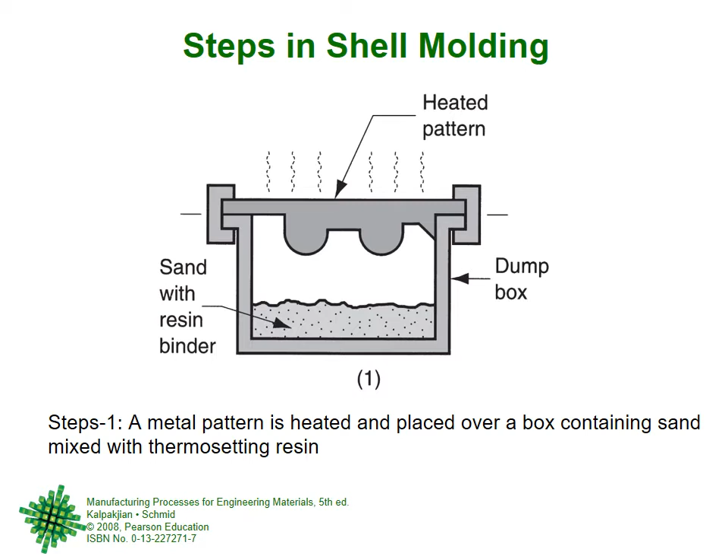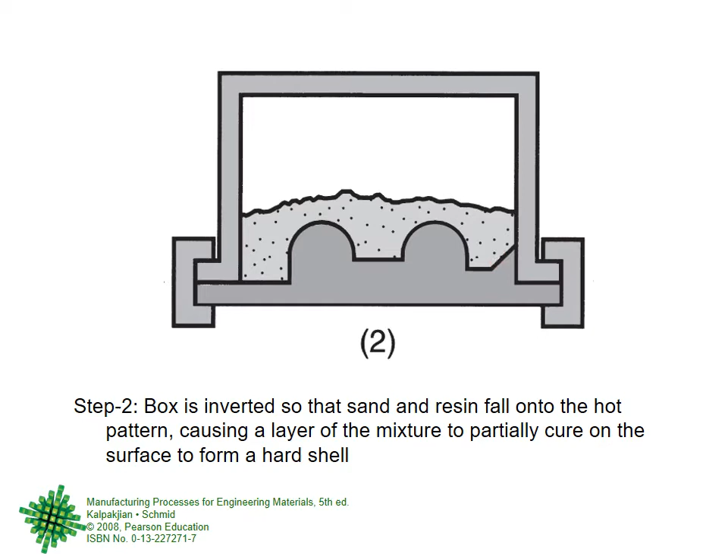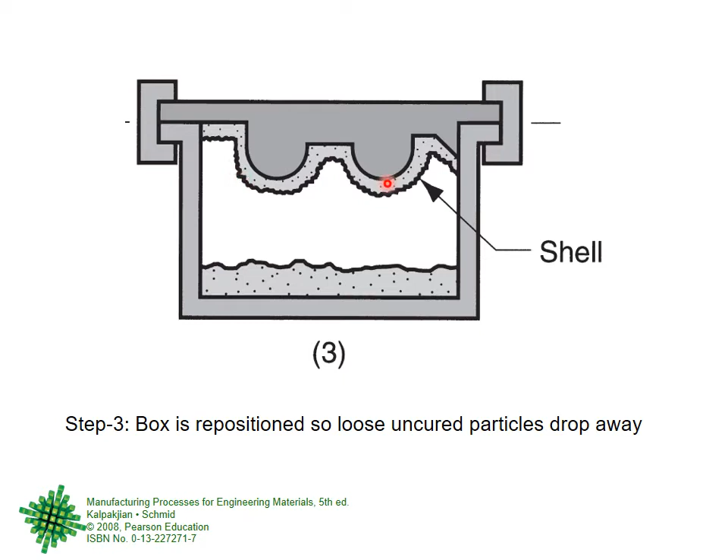So we were just telling you the steps in shell molding once again. So now the box is inverted so that the sand and resin fall onto the hot pattern, causing a layer of the mixture to partially cure on the surface to form a hard shell. So a shell is now made, right? The box is rotated. Now the box is repositioned so the loose particles drop away. So now it is again rotated, and whatever sand glued to it, the shell, is there; the rest of the sand is here.

And then the sand shell is heated in an oven for several minutes to complete the curing. So the shell that was made in the previous step, you take that and you heat it in an oven. Of course, the temperature, the time and so on are pre-designed by people who are very knowledgeable in the type of sand, the type of binder, the type of chemical agent and so on. So what temperature will be in the oven for how much time, 2 minutes, 3 minutes, it is all pre-designed, right?

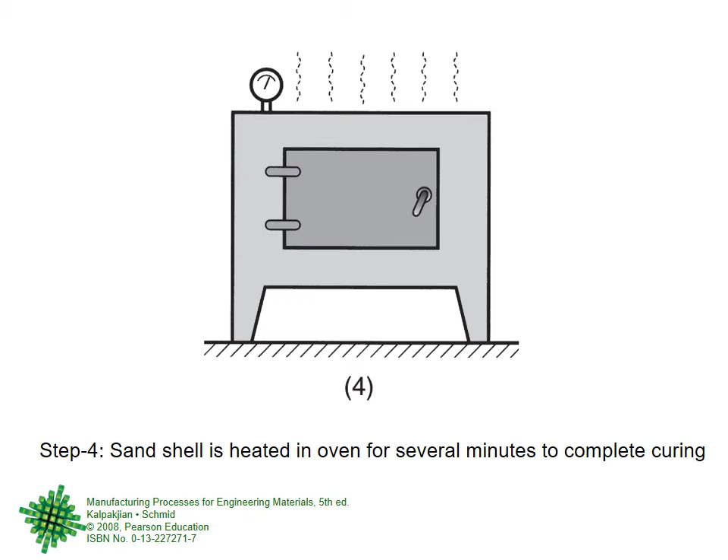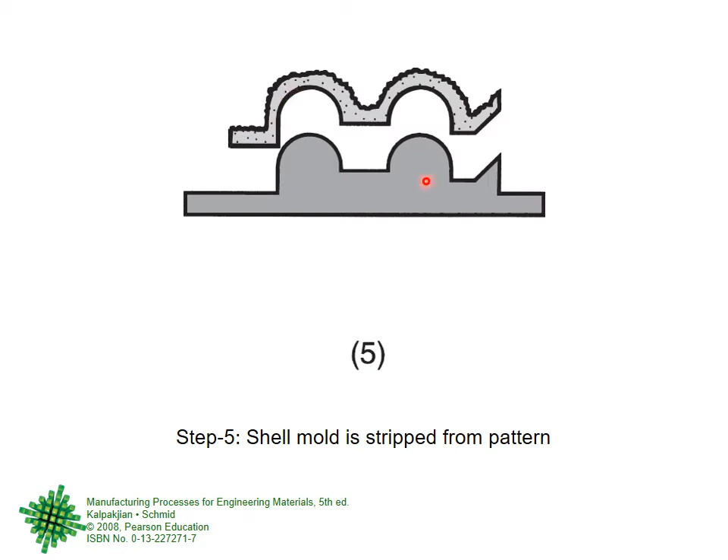So now the shell mold is stripped from the pattern. The pattern is a metal, remember? So now either by heat or because there was already some parting agent here, this shell is removed. So this is the mold. This was the pattern. This can be used again and again to make the shell. And now the two halves. So this is one half, this is the other half.

So now this is the total flask, and the two shells are clamped together, and so forth. So the two halves of the shell mold are assembled, supported by sand or metal shot in a box. Outside it there is some sand or some metal shot. Metal shot means small pieces of metal to support it, because you have to support it now. And the pouring is accomplished. So now you start pouring it, right?

So this will be a little more costly than normal sand casting, because the type of sand that you are using for the mold here is much finer. That is why the surface finish and the dimensions are better. And then you need those metal patterns to be heated, and then you need some oven curing afterwards, and then you need to pack this general sand around it. So it is a little more cost.

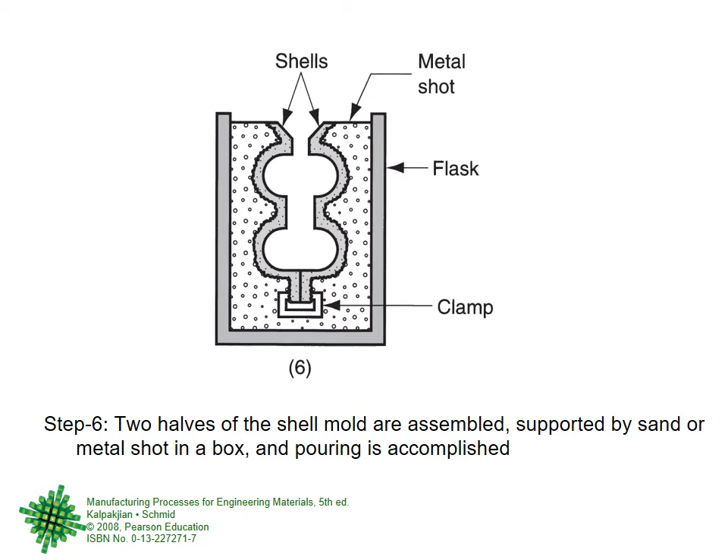Advantages and disadvantages. I think you already know the advantages, but just to save time, we will quickly go through it. A smoother cavity surface permits easier flow of molten metal and better surface finish. Easier flow and better surface finish.

Good dimensional accuracy. Mold collapsibility, breaking of the mold, because it is only a thin shell rather than breaking the whole core and so on. And it can be mechanized for mass production. This is major, that these steps, step 1, step 2, step 3, can be done automatically, mechanized.

Disadvantages: more expensive. The metal pattern is there and the whole process is more expensive, and it is difficult to justify for small quantities, of course, because of the cost now with the metal pattern, with the heating arrangement, with the oven arrangement and so on, with the shell mold in 2 pieces and joining them together. So the cost is extra.

Therefore, if you have 5-10 pieces to make, then just do it by normal sand casting. But if you have a large number of pieces, then the extra cost is divided into 100 pieces, into 500 pieces. So the extra cost per piece is almost nothing, right? So these are the advantages and the disadvantages.

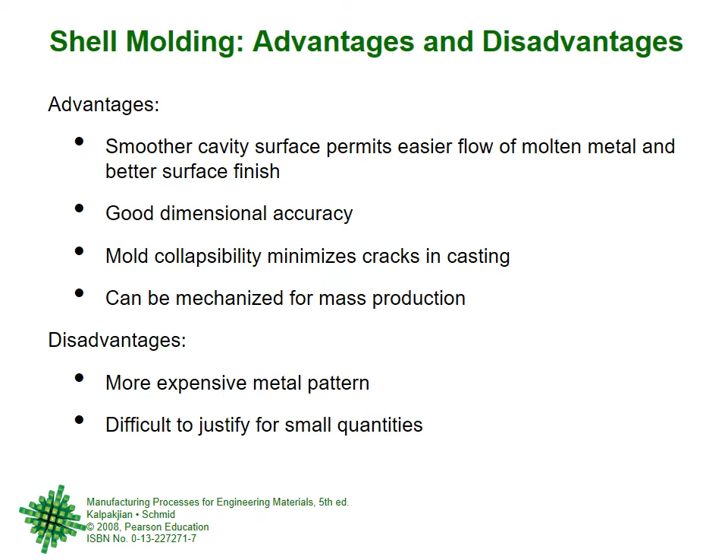Another method, plaster mold casting. Again, don't read, just tell me where you have heard the word plaster, either you have used it yourself or you have heard it somewhere. One is that if, na'udzubillah, anybody has a bone fracture, and you go to the hospital, to the orthopedics department, they put a cast around you. That material which they put around you after setting your bone is called plaster, right? So that is a major place where plaster is used.

And I don't know if girls do it today, if they make dolls at their own home instead of just going and buying a doll. If they make dolls at home, there is this method. Plaster is the material, and for the doll they want, they have a very thin shell, right? Just like the shell mold. They have a thin plastic shell of the doll.

And then they prepare the plaster at home, they pour the plaster inside, and after it cools down, they remove the outer plastic and the doll is there with the whole shape. Now you can do your own painting and patterns and so on. So for people who are interested in doll making, the plaster is there, right? Okay. So this is the plaster.

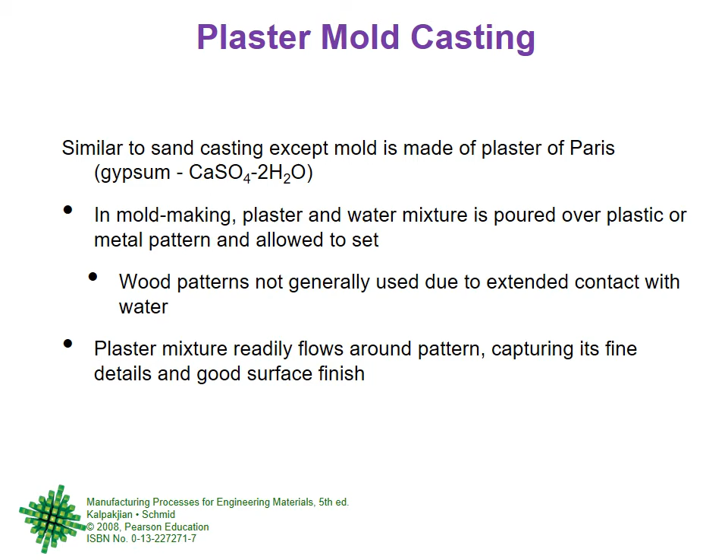Therefore, plastic pattern or metal pattern. Of course, the metal pattern will have to be good so that it does not corrode easily. The plaster mixture readily flows around the pattern, capturing its fine details and good surface finish. Right? This plaster of Paris is a very fine powder, even finer than the fine sand used in shell mold casting. So the surface finish and the final dimensions will be very nice.

Again, the advantages and disadvantages. Advantages: good accuracy, good surface finish, capability to make thin cross sections. Disadvantages: the mold must be baked to remove the moisture, otherwise the moisture can cause major problems in the casting. The mold strength is lost if over baked. So the baking has to be very careful so that the moisture is removed, but you don't over bake, otherwise the strength is lost. And plaster molds cannot stand high temperatures.

So it is limited to alloys that have lower melting points, right? Because the plaster mold is there. If the metal that you pour is of a higher temperature, then the plaster is gone. So very good surface finish, very good final size, but only low melting temperature alloys can be used. But if they can be used, then it is a very good method.

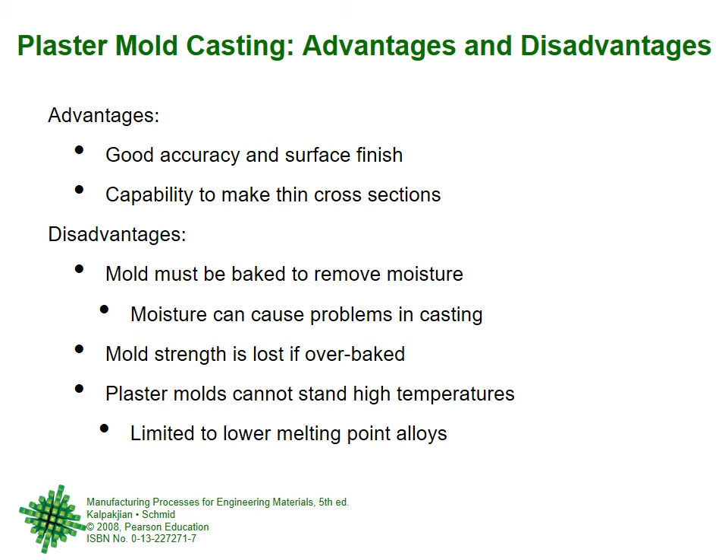Applications of plaster mold: metal molds for plastic and rubber molding, the molds that you use to make rubber and plastic parts. Pump and turbine impellers, these are major. Other parts of relatively intricate or complex geometry. And this of course can be used for lower melting point alloys such as aluminum alloys, magnesium alloys, and some copper base alloys only. But for these, even complicated things like impellers, fans, not the whole pump and turbine, and other intricate geometry.

So this is the third method. The first, the largest, is sand casting. The second was shell mold casting, and the third was plaster mold casting.

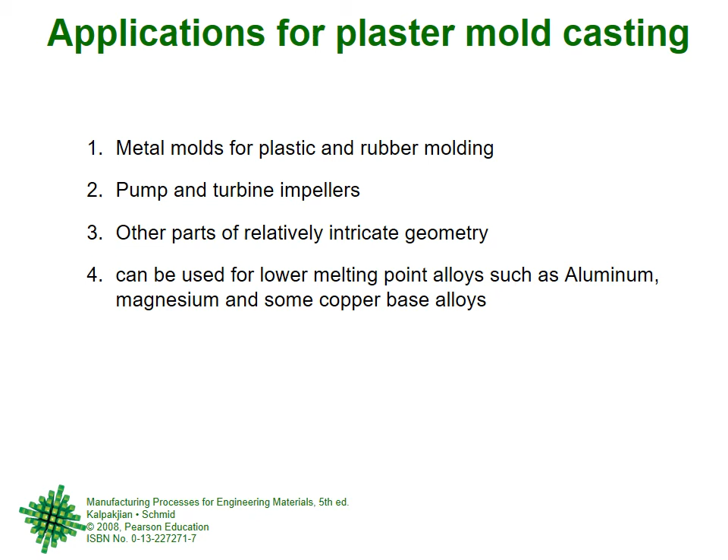Ceramic mold. Sorry for my typing mistake, it is ceramic with an E. Everything is human error, and later on hopefully I will remove it, but for your class now this error is there. It is ceramic.

Once again, you know from your material science that ceramics are a type of material. Sand is itself a ceramic. The plaster of Paris may itself be a ceramic. But here we will use ceramics of higher strength so that they are higher temperature resistant. So this is similar to plaster mold casting, except that the mold is made of a refractory ceramic. Refractory, remember, high temperature resistant, that can withstand higher temperatures. So it is a type of improvement on the plaster mold casting.

In plaster mold, a lot of advantages are there, but the major disadvantage was that plaster will melt or break and will not be stable at higher temperatures. So you could use plaster mold only for low temperature alloys. Now you use material which is refractory ceramic. But of course, you will have to have very fine powder of this ceramic. The rest of the process will be similar to plaster mold casting, so you don't need to describe these steps. It can be used to cast steels, cast irons, and other high temperature alloys.

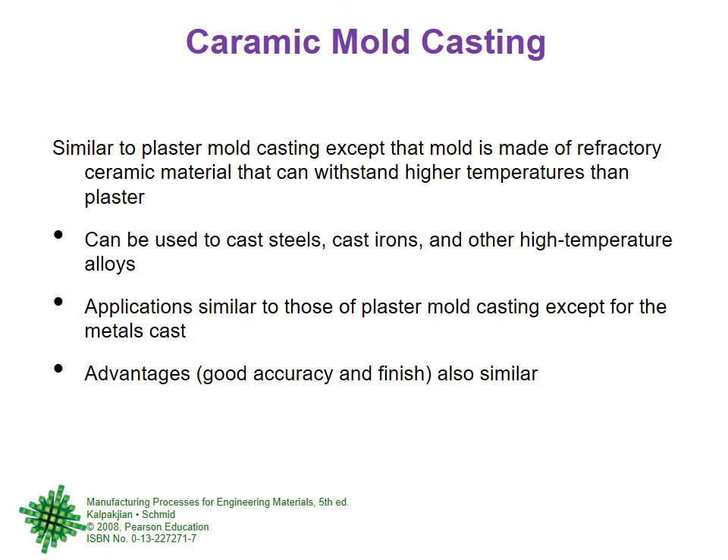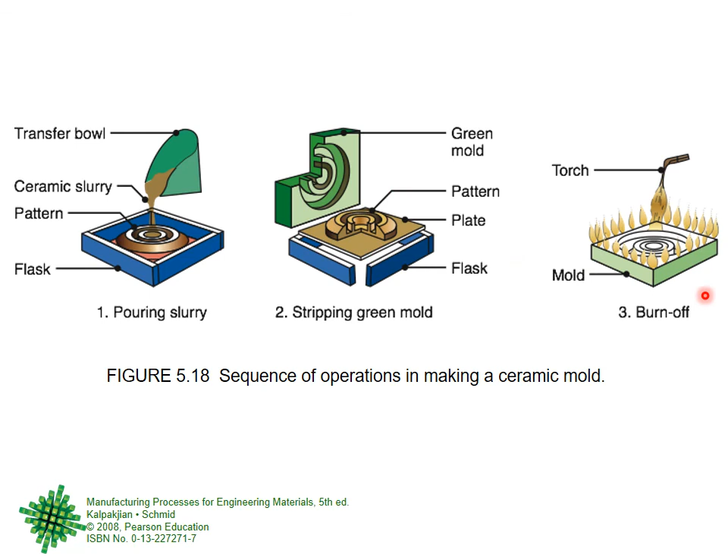And here are the steps: there is a transfer bowl with the ceramic slurry, ceramic powder mixed with liquid to make it flow. Then there is the pattern, you pour it on the pattern and the flask is there. Then stripping the green mold, you can remove things, so only this part is remaining. And this part is then baked with a torch so that the extra parts are burnt off and it becomes a little stronger through baking also.